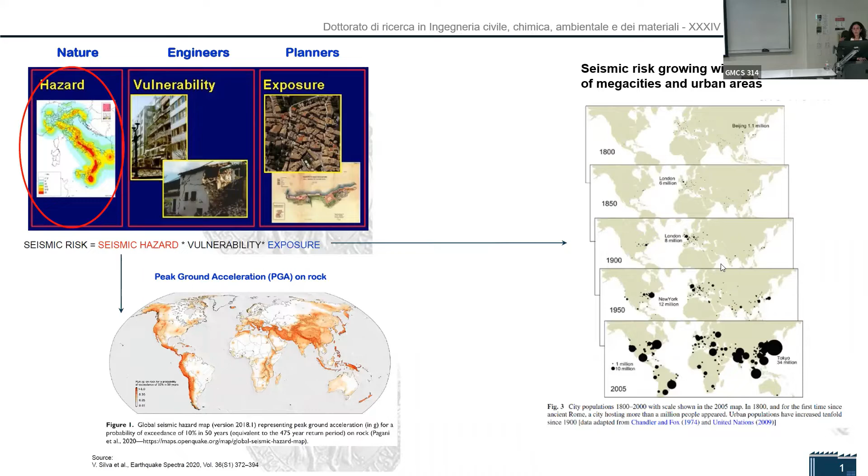It is getting higher, and so the mega cities are spreading all over the world, and this means that the exposure is increasing. So this will increase, of course, the risk, and we need to focus on this aspect.

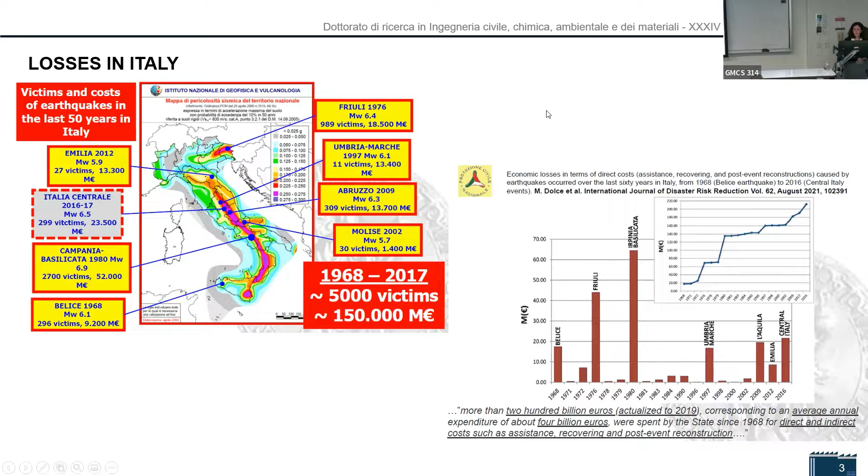So this is just an introduction of what I did. So as you understood, risk is actually a multidisciplinary problem, because you should evaluate the seismic risk in your area for your building, knowing both the properties of your building and the hazard of the site. And you should also be able to make a quantification of the values that are exposed to the risk.

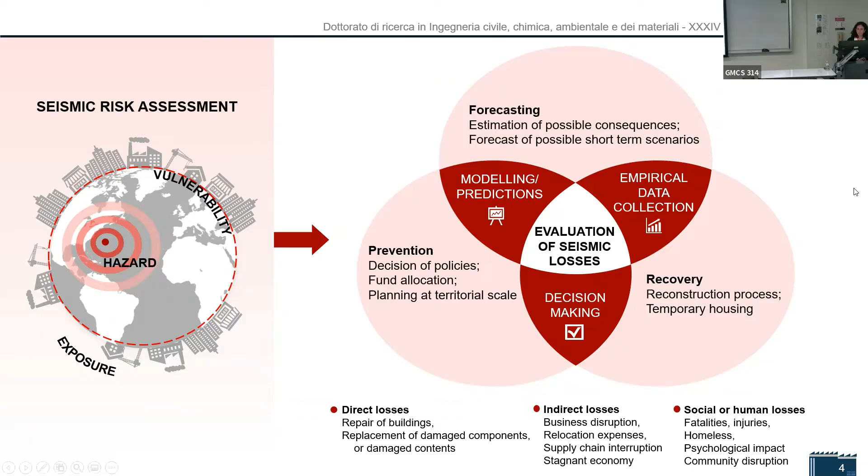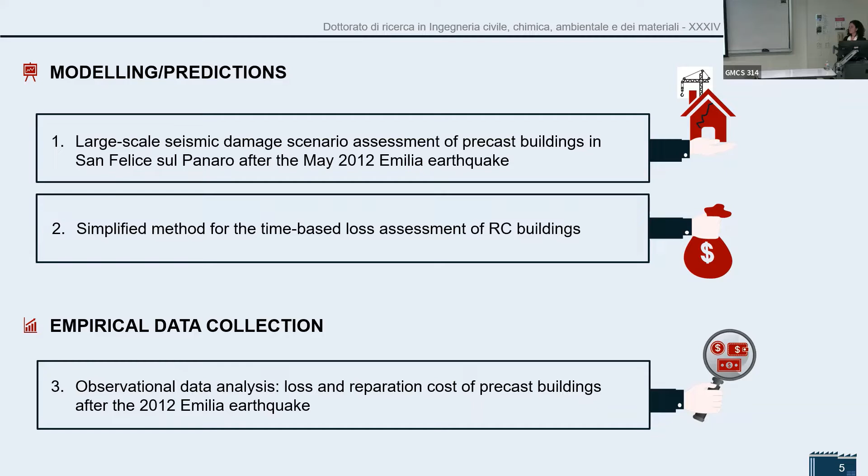So I will focus mainly on three main topics which I addressed in my PhD thesis. Two of them dealing with modeling and prediction of losses, and one dealing with empirical data collection. The first one is a large-scale scenario assessment, considering the industrial areas that are hit by an earthquake.

So in this case, we consider the seismic event in the Emilia-Romagna region, which is our region, that hit the region in 2012. And in particular, I was focusing on the seismic behavior and the damage and the losses of precast reinforced concrete buildings.

In our region, there are many industrial districts where these kinds of production, commercial and industrial buildings are located together. So basically, there is like a town and close to it, small industrial areas. It is pretty much like this everywhere in our region. And in these districts, there were many structural collapses after this seismic sequence.

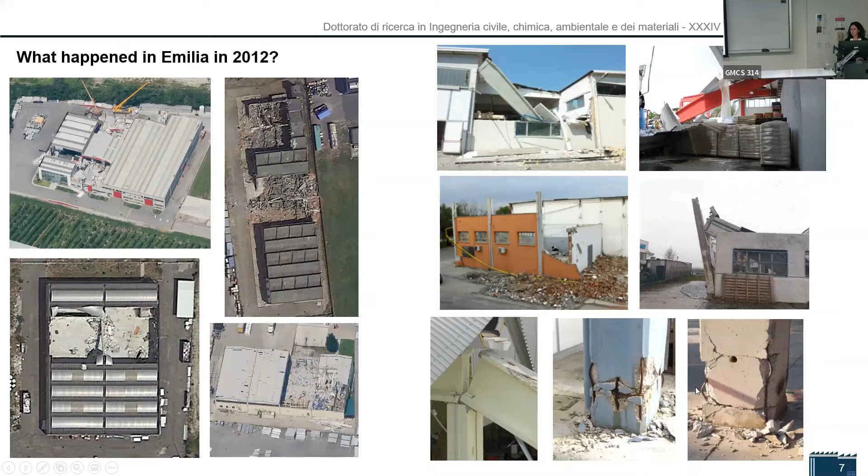So there were many collapses due to loss of support like these, but also collapse of the roof, loss of verticality of the columns like this one, and then formation of flexural plastic hinges at the base of the columns.

Moreover, there were many examples of damage to non-structural elements like the perimeter cladding panels, which were precast as well, very heavy. In many situations the connections were not sufficient to sustain the mass moving with the earthquake.

So there are many examples of fallen precast cladding panels and loss of verticality, but also fallen masonry infill walls like this one below, or out of plane behavior of the masonry walls like in these pictures.

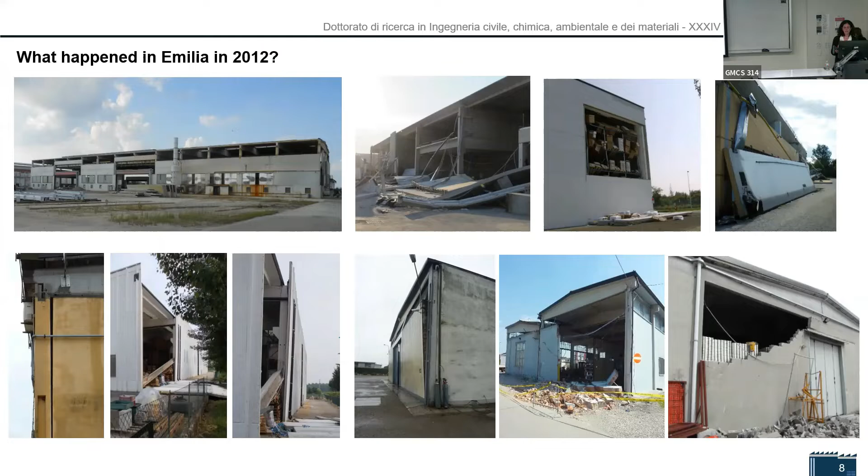So there are different kinds of seismic damage, but it is possible to classify this type of damage, and they are pretty much recurrent. This makes our work easier because for this kind of buildings it is quite easy to understand the seismic behavior, as there are few examples of damage development and collapses.

So what we did is we wanted to create a method in order to perform large-scale risk assessment for industrial areas with this kind of precast buildings.

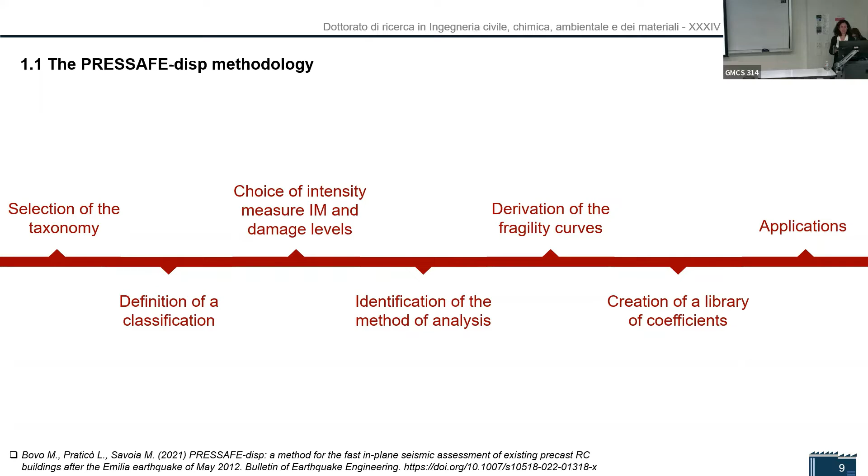So we have just put a mark on different steps of the analysis, and all of them were involved in quite a lot of work, actually. First of all, we had to select the taxonomy.

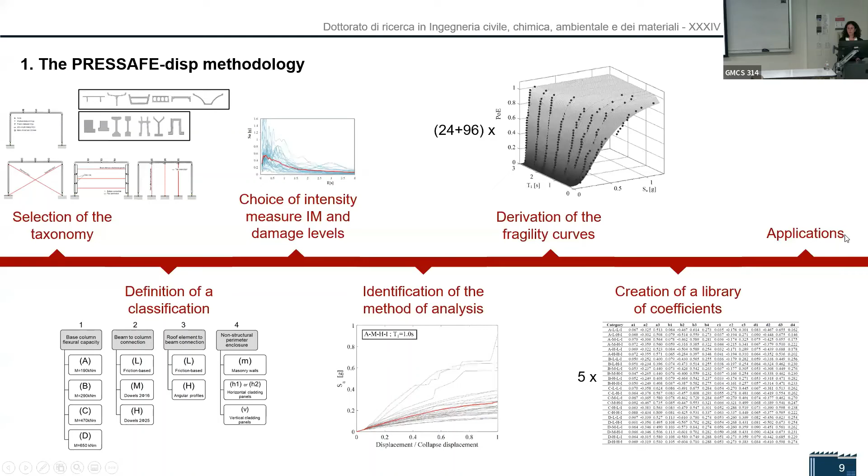So this was the aim. But how could we know if the curves were reliable or not? We did an application of a seismic scenario to see if it was possible to find reliable results, knowing a specific real situation.

So what we did is we found an industrial area, San Felice sul Panaro, which was very close to one of the epicenters of the seismic events in 2012, inside the Emilia-Romagna region, up here close to Bologna and Modena.

And yeah, here it's there's Cesena, which is my hometown, just to see.

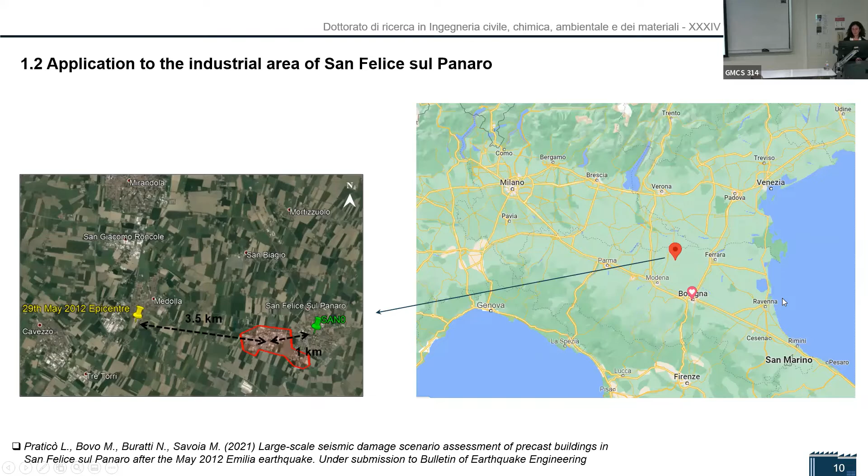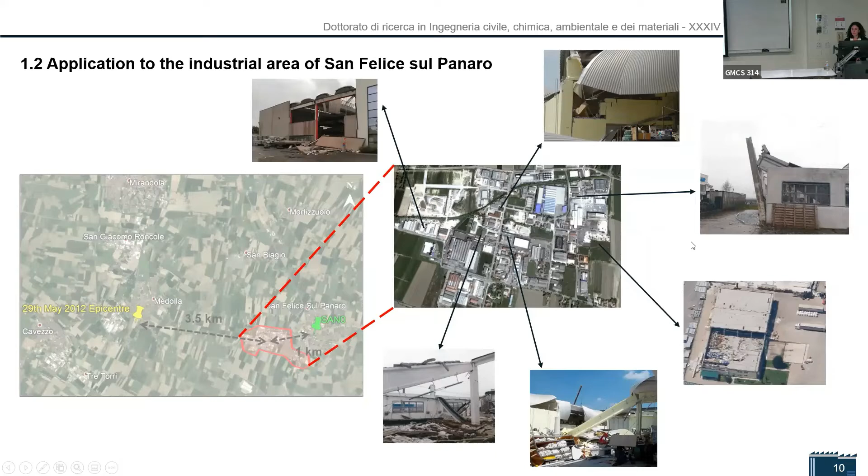So we selected this area, which is the industrial area of the city of San Felice, with about 100 industrial precast buildings. Those buildings behaved in the same way that I've shown you before, so there were the same kind of damages to the structural elements.

So we performed a large-scale evaluation of the number of collapsed buildings under a specific seismic scenario, because we had a huge amount of documents on what happened during the seismic sequence in that area. So we were able to see if our curves can work to provide the result of a scenario assessment like this, and to forecast the exact number of collapsed buildings in this case.

So what we did is we developed a Monte Carlo analysis in order to simulate the behavior of those buildings under 3 different seismic scenarios, all referring to the event of the 29th of May 2012. And we knew that the exact number of collapsed buildings in that scenario was 42.

So it was nice to see that going from a less refined to a more refined seismic input - basically the quantification of the ground motion - with a very refined model for the seismic input, we came out with a good matching with the average number of collapsed buildings in the area, using this scenario analysis.

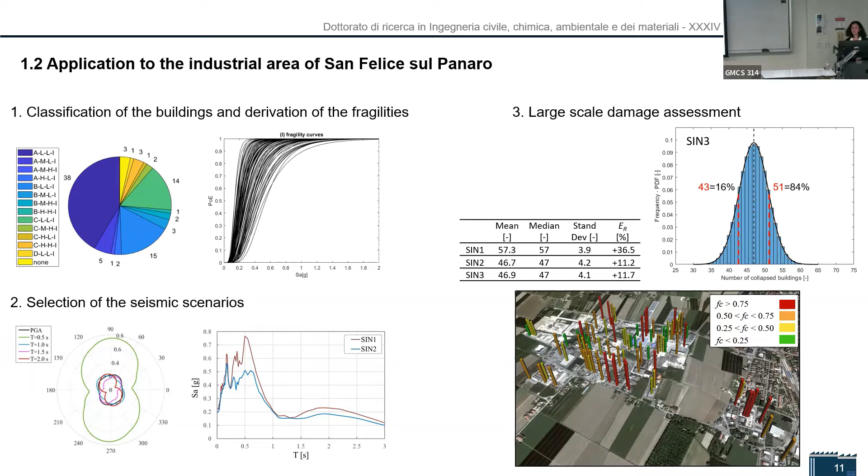And we will perform similar verification also in other industrial areas for sure in future works. So this is just an idea of what I was saying before. We also developed a more direct simplified method that can be used to obtain rapid results, and what was nice is that these 2 methods were giving mostly the same outcomes.

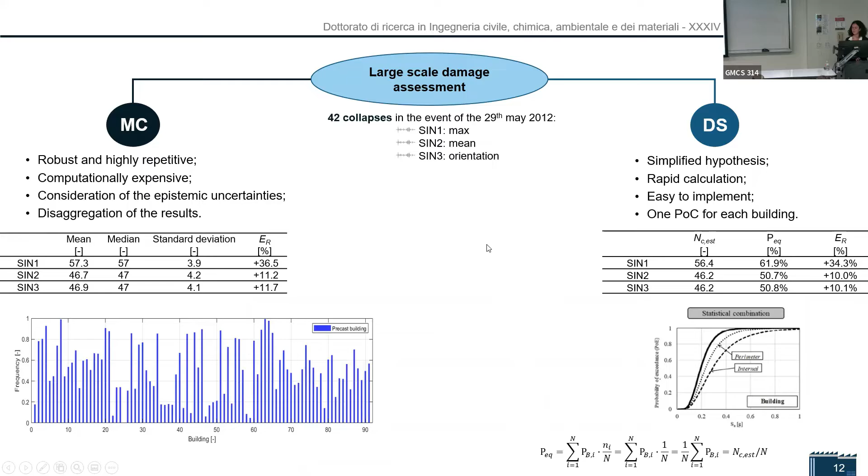So the goal of this first part was to try to provide a tool giving a uniform approach at the large scale for the risk analysis of precast buildings, a tool that requires few data to be used. And it was good that we found a good agreement in application of the methods compared to the real data that we got after the seismic event.

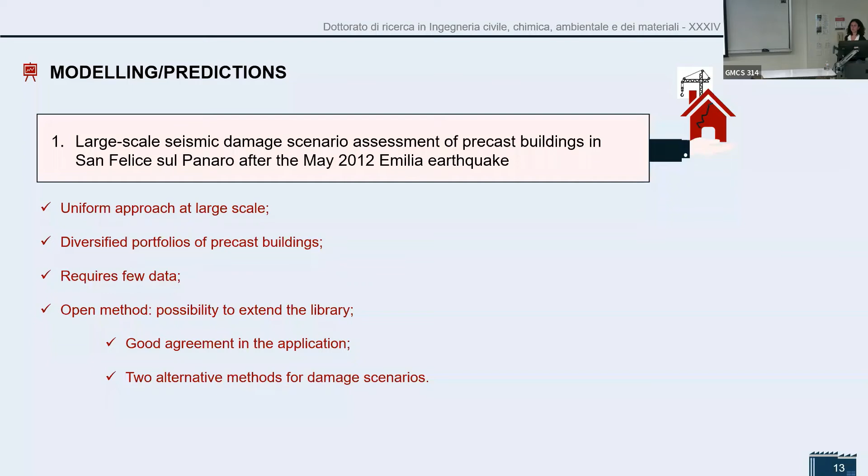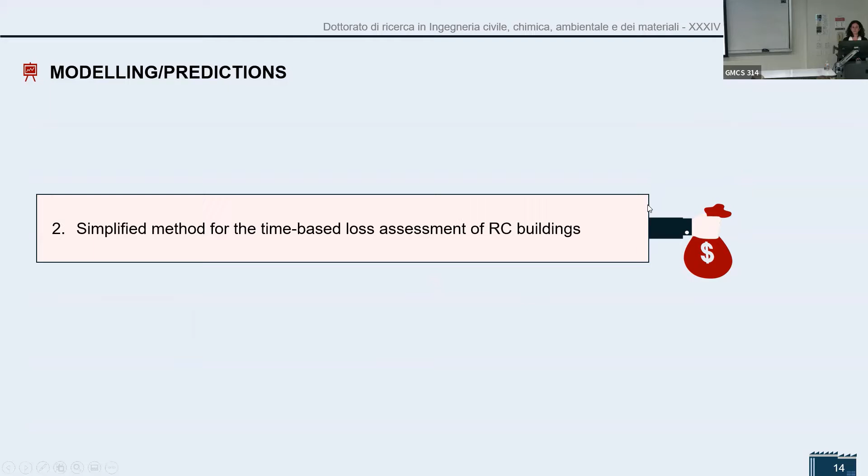Okay, so very fast, another tool that I developed concerning the modeling and prediction of losses is a time-based loss assessment on reinforced concrete buildings.

So maybe it's not the same here, but in Italy, ordinary buildings like houses, offices, residential buildings, are mainly masonry or reinforced concrete. This is the majority, at least.

Since our existing buildings are quite weak to seismic actions, we need to retrofit them. We developed a method to estimate the unconditioned losses - this is why it is called time-based assessment - so to estimate the losses under several seismic actions that may happen to this building in 1 year.

This is the idea: in order to evaluate which kind of retrofit option can be the optimal one for a specific building. In this case, this tool is devoted to application on a single building, not a large-scale application, and should be used in the preliminary phase when you have to decide which kind of seismic intervention can be most appropriate to your structure, to lower the amount of expected seismic losses.

And here we have considered 3 applications: FRP techniques like fiber reinforced polymers, concrete jacketing, and CAM, which is an Italian technique, like an active confinement technique with steel elements. So basically they are quite simple interventions, but quite common, applied mainly on the columns in frame RC buildings.

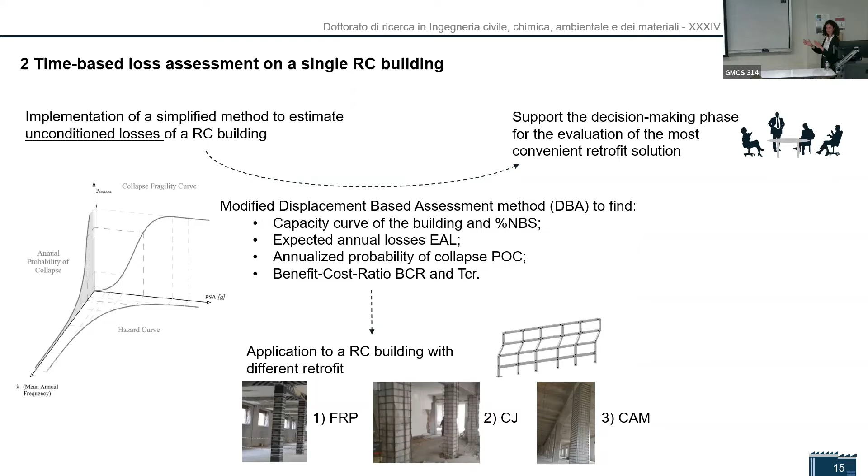So this is the framework of the analysis, and it is a simplified analytical method, starting from nonlinear static analysis, the pushover analysis, that is implemented nowadays in every software of structural calculation. This method is thought to be simple and used by practitioners, by engineers. So it shouldn't be very complex, but still able to give reliable results, at least for the comparison of the different options.

This is the goal. So starting from nonlinear pushover analysis, we are basically considering the losses coming from the repair of the structural elements, the repair of the non-structural elements, but also coming from the probability of demolition of the building and the probability of collapse. So if the building survived the earthquake and has to be repaired, or if the building is heavily damaged and has to be demolished or collapses.

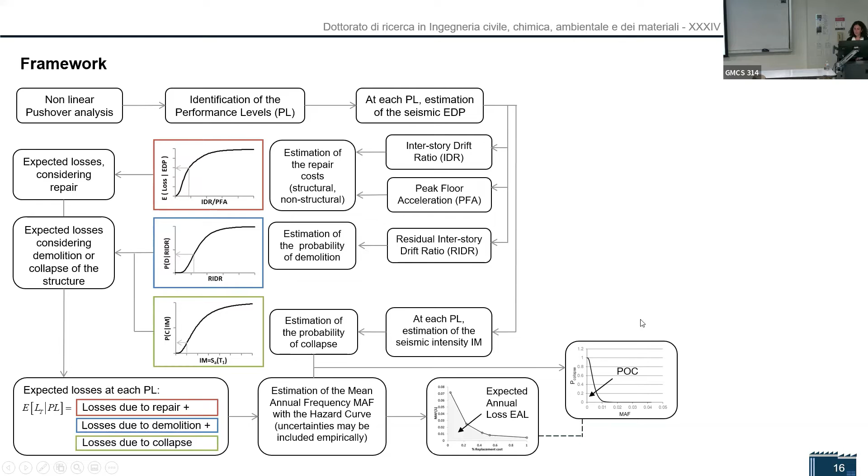This is the idea. In this time-based framework, we come out with this term, expected annual losses, and a term which is the annualized probability of collapse. These loss terms should be compared together in order to find the retrofit option that gives the lowest expected annual losses and the lowest annualized probability of collapse of the buildings, which means your building is good, it is robust to seismic action. This is the idea.

And then we evaluated some other economic parameters like the cost of the retrofit, the net present value, which is the loss after a certain life period of the structure, like 50 years, which is common for ordinary buildings, and the benefit cost ratio, to let you understand which is the most economically convenient retrofit option.

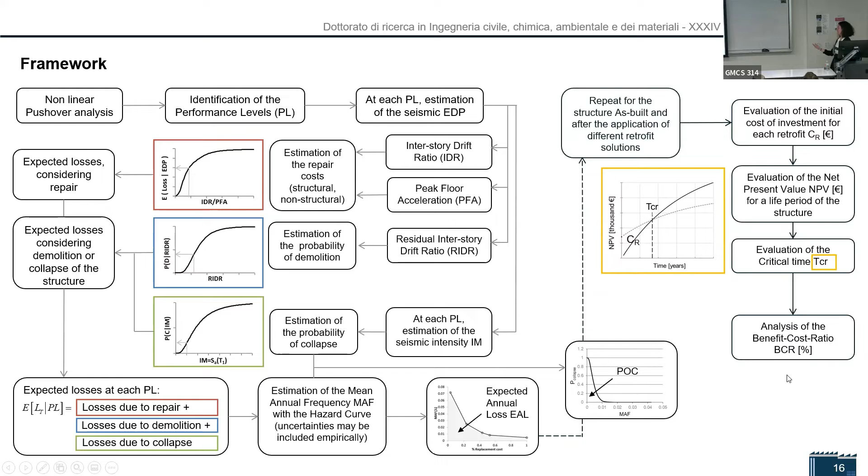So yeah, we just got some results for this building. I will go fast here. Finally, the aim of this tool is to provide a graph like this one, where you can directly compare the result of your analysis, knowing for each option, like making separate pushover analyses on different models.

So you model the effect of this retrofit, of each local intervention on the columns. You run the analytical analysis, which is a step-by-step analysis. It is quite simple, it's not complex.

But finally, you come out with an indication of the expected annual losses, which is the amount of losses expected over 1 year, annualized, the probability of collapse, but also the NBS, which is the indication of the safety of your buildings, like a safety index, and the benefit cost ratio, which depends on the initial cost of investment that you have to sustain for each retrofit option.

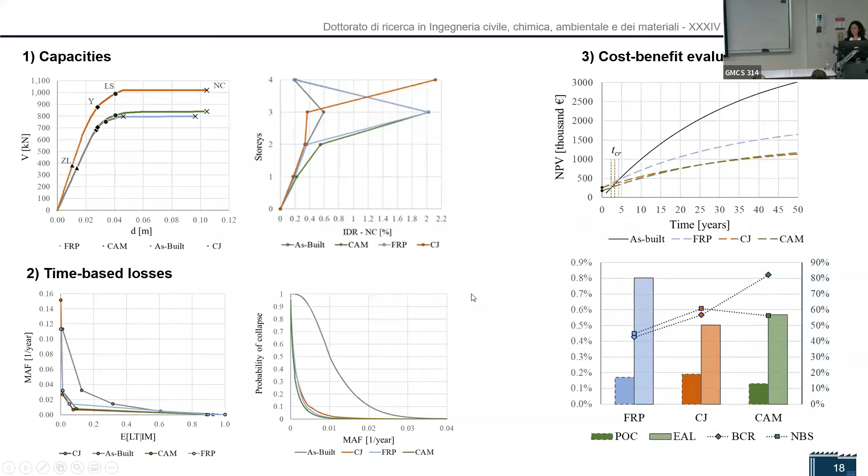So if you compare these terms, for example in this case, the CAM option is actually the best option for the case study building that we evaluated, because it is able to lower the losses, the expected annual losses, the probability of collapse of the building, but with a high benefit cost ratio. So it means you're not spending too much money, and you also have a good safety index of your structure. So looking at this graph, I would go for the CAM option for that case study building, for example. So this is the idea.

I will not go into too much detail on this. So what was the aim again is to give a tool to be used at the design stage, not to give the best absolute results, but to set a uniform approach for a comparative evaluation of the results. So if you have several options and don't know what to choose, if you just base your evaluation on the initial cost of investment and on the result of some modeling, it may not be enough.

You should also make some loss evaluations. In Italy, recently they developed something similar, but even more simplified, to try to set loss evaluations in the work of engineers, because they should be quantified, they should be computed, since it is not enough if you just compute a safety index for your buildings. So this is the main idea of this work—everything is to support the decision-making phase of the engineer, but without complex analysis.

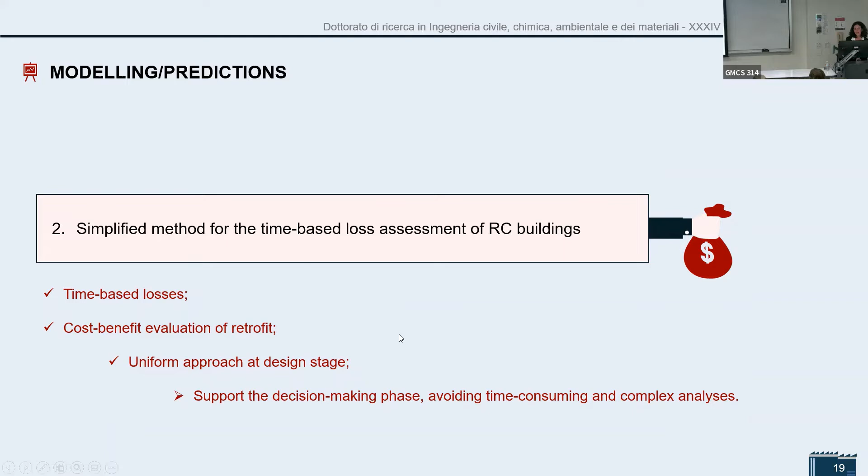And okay, in the last part, I saved some time for this, because here I had the opportunity to work with some important data regarding, again, the 2012 Emilia earthquake. Of course, this earthquake in particular hit and damaged ordinary buildings, but I was mainly working again on the precast reinforced concrete buildings, damage and collapses.

It's important to have an idea of what happened in terms of losses and in terms of data of the damage. In particular, in our region, this is a scheme of the core area affected by the seismic sequence in 2012. In that area there was an industrial hub that was very important, hosting different companies, Italian but also international, that were producing the majority of the income for the area, for the region, but also for Italy. So there were many industrial clusters, from mechanics to food industry, and also biomedical products.

So the problem was that all these companies were working in unsafe production buildings, because those buildings were not designed for seismic actions. Because before 2012, that area was considered in the national regulation as non-seismic. So we were not expecting that ground motion. That area was producing 2.5% of the national PIL.

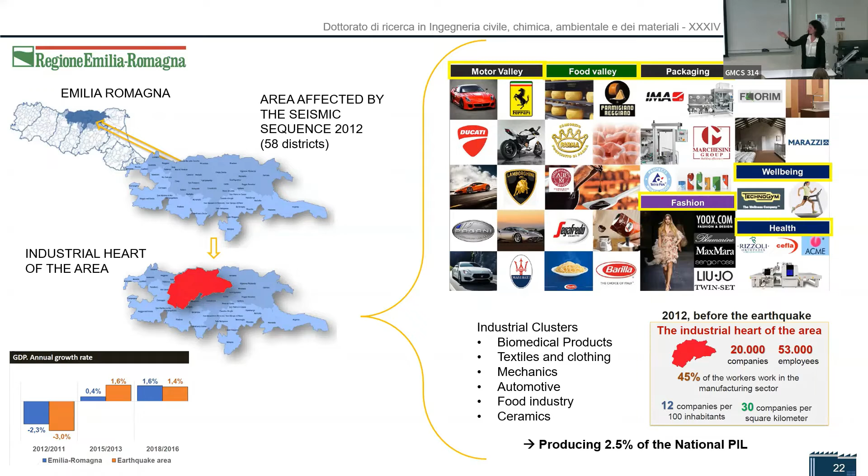What does PIL stand for? Yes, that's the Italian. It's the Prodotto Interno Lordo, which is the Italian for GDP, gross domestic product. Yeah, you're right. I have to change it. Okay.

So our region, Regione Emilia-Romagna, created a database aimed at collecting all the requests for funds for the reconstruction after the seismic sequence, in particular those concerning the production buildings. There was a specific decree defining all the criteria for the reconstruction, the repair and the retrofit of the buildings, but also for the restoration of the products, of the industrial machinery, and the relocation of the activities.

So this was the entire Sfinge database. There were more than 2,000 industrial buildings, with all the data about damage to the structures, damage to the contents, and the economic losses, which were equal to the amount of funds to be given for the reconstruction by the state. I created a smaller database, because I had to make a process of selection to define only the precast RC buildings, those we have seen before. This smaller database is like 1/3 of the biggest one, and another even smaller database has also some geometrical structural information on the buildings.

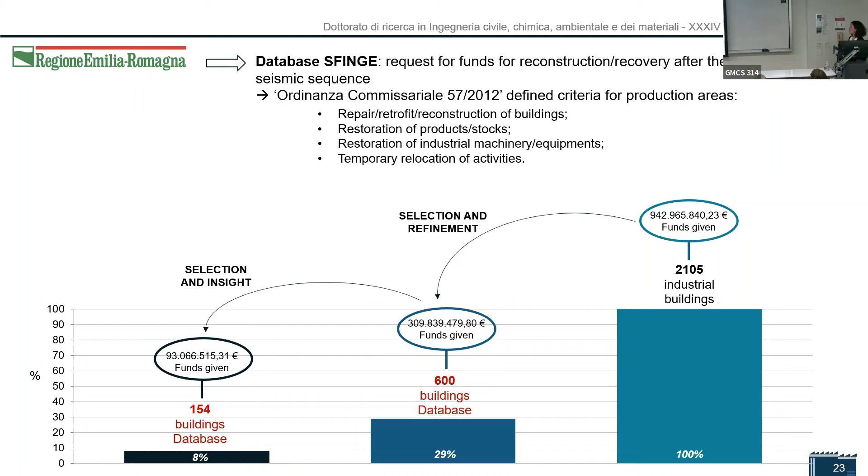With those data, it is very important for us, in the field of risk assessment, to study the real data of losses and damage on buildings, because with this data you can calibrate your models. So it's important for us to spend time working on these databases to find suitable consequence functions. We will see them.

Okay, sorry. So first of all, we had to identify a damage scale, from D1 to D5: the building experienced slight damage, moderate, heavy, very heavy, and then collapse. We had to define also some criteria for this. There are some recognized criteria depending on, for example, the amount of columns with plastic hinges for moderate damage, the amount of surface collapsed, these kinds of numbers.

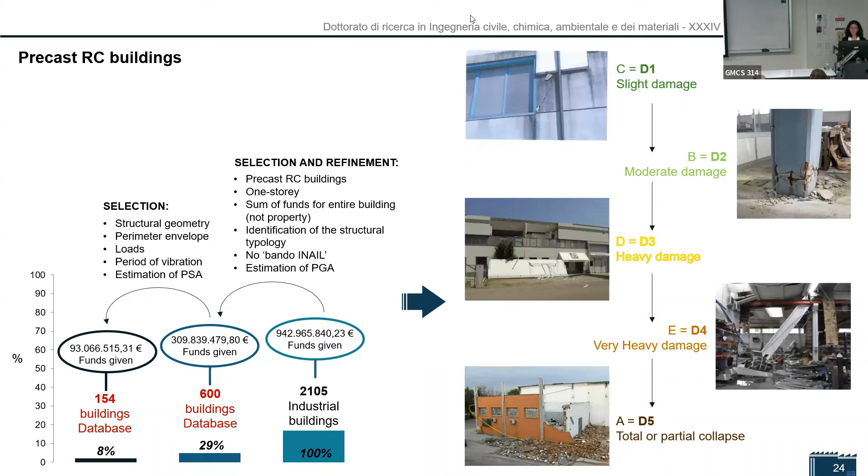This is very similar to these pictures you may have seen from the European Macroseismic Scale from 1998, which is one of the reference documents for us for the seismic damage scale on ordinary buildings like masonry and reinforced concrete, and I have added my own scale on precast RC buildings.

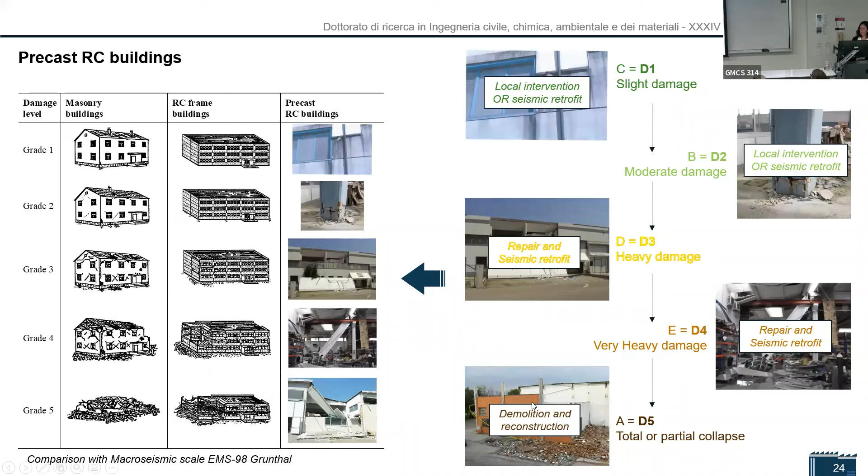According to the regional regulations, there were also some instructions for the repair and retrofit of each building, depending on the damage scale. For example, for D1 buildings, they said they needed local intervention on some structural elements or entire seismic retrofit. Whereas D5 buildings had to go for demolition and reconstruction, of course.

T1 are the oldest industrial buildings and the smallest ones, while T2 and T3 were the newest, in which T3 were the newest ones with the highest columns, the longer precast elements, the largest surface in plan, for example. So these are the most common ones in the region, but I can say also in other parts of Italy.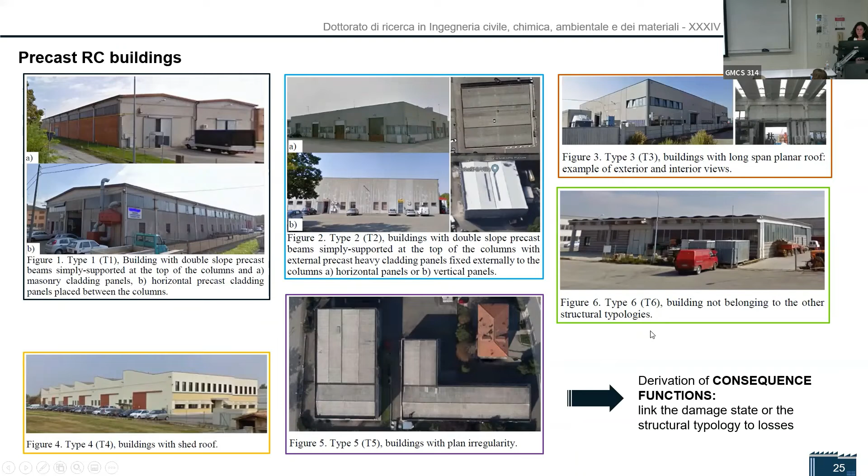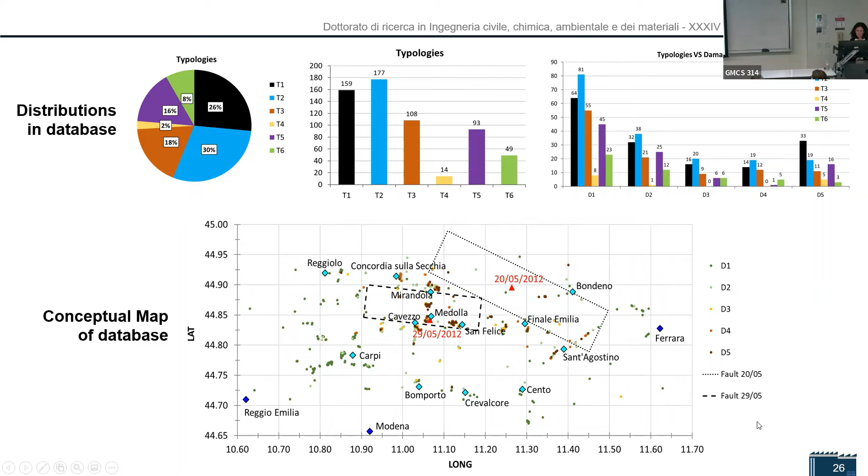So what we have to do is consider the main typologies, the most recurrent ones, like T1 to T3 in this case, and derive consequence functions. It means that for different structural typologies and for different damage states, we wanted to define the distributions of the seismic losses, understand the mean value of this distribution, the deviations, but also all the statistical parameters, and calibrate suitable functions that may be adopted in seismic risk assessments.

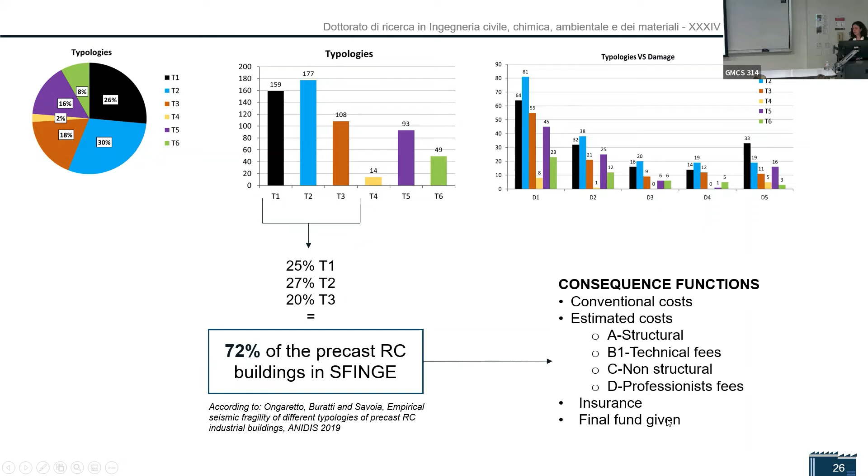So these functions may be used in the models in order to forecast the possible losses, because these are based on real data. And what is interesting is that in the database, the structural costs, non-structural costs, but also the fees were categorized differently. And there were also some other voices like the insurance and the final fund given by the region, which were not always corresponding to the entire losses. There were some different cases.

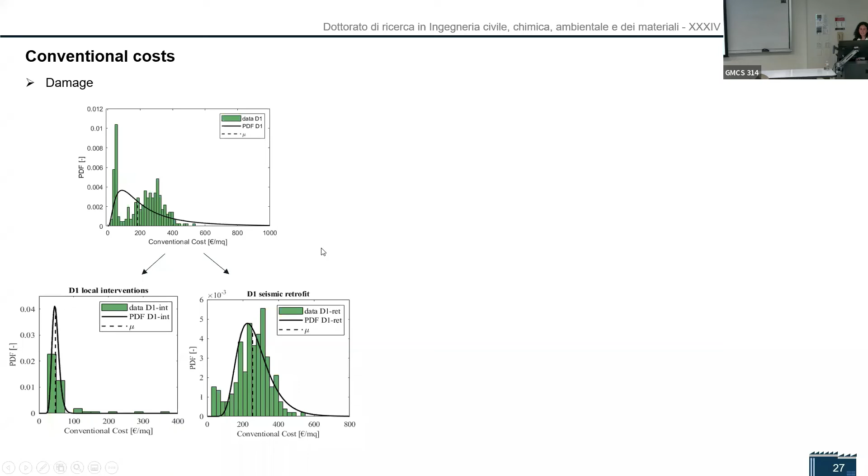You can identify a first peak here, and then a second peak of the losses here: D1 regarding all the buildings that just had to do local intervention techniques on, like, the columns, for example, and this other group of D1 buildings, still experiencing slight damage, but which had to pay for the seismic retrofit of the entire buildings. So of course, we are expecting that these losses are higher, and we cannot just make a consequence function like this one, because it is not reliable, it is not realistic. So this is one of the issues that we had to consider, and we did it. I just reported some examples of what we did.

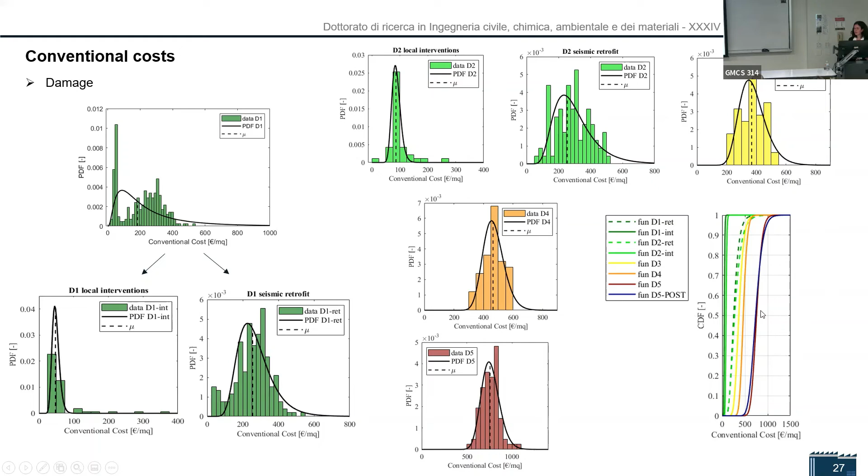So for each damage state, from D1 to D5, we came out with these curves. They are quite stretched, but this is the cumulative density function. So knowing this curve, if you have a specific damage state for your building, in this case for the precast ones, we are able to know the expected average conventional cost in euros per meter square, and we are able to make predictions. So we did it for all the structural components.

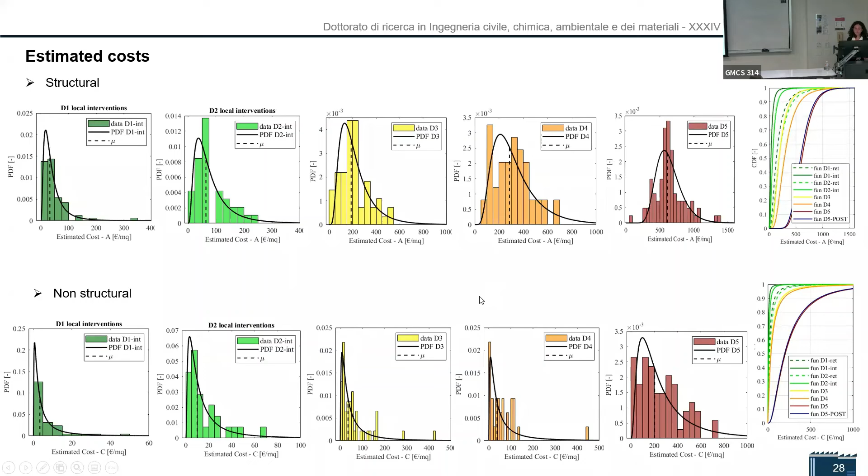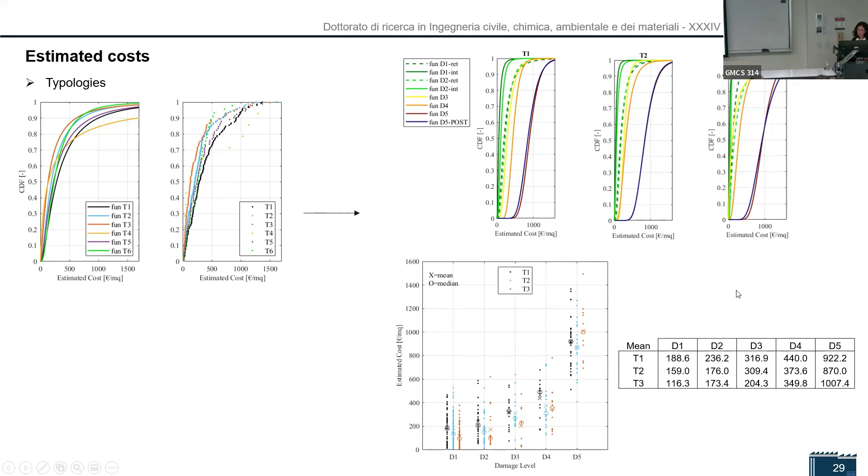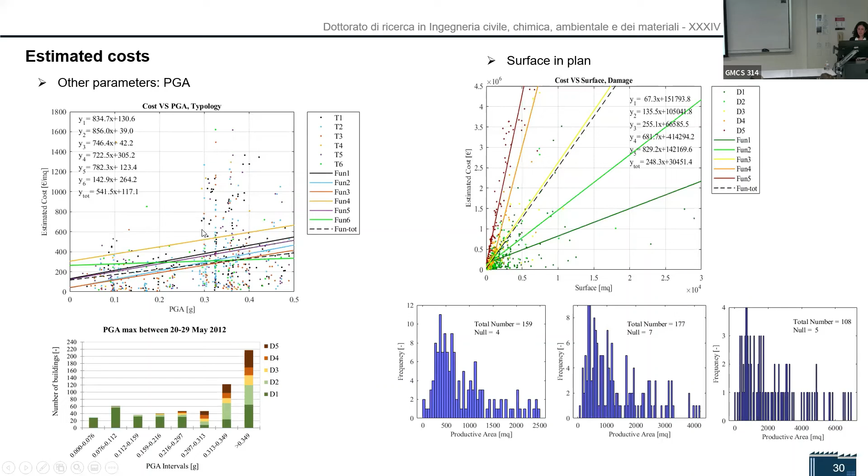So we came up with many data. Also, we have studied the amount of expected losses against the PGA, so the shaking intensity, and also the surface plan of the buildings. So these are just other useful functions that you may use in your modeling. Even if I have to say that with the PGA there is a huge deviation of the values, we know this issue.

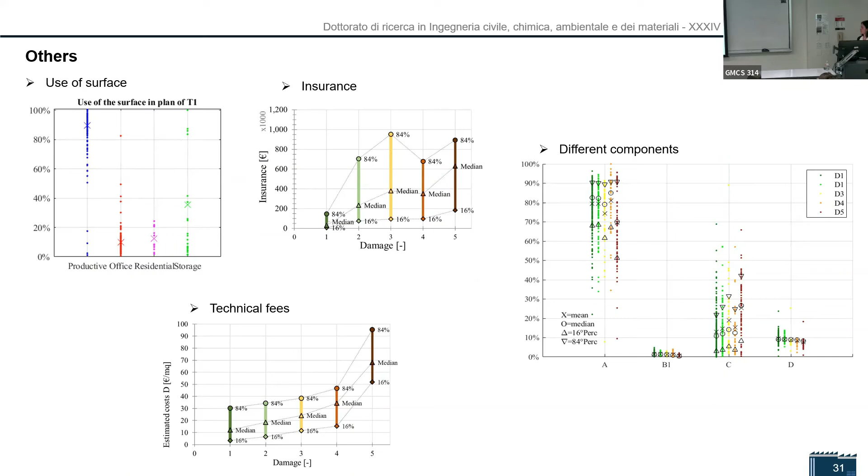And then just other interesting parameters that you can study in your database, like the insurance, the percentage use of the surface of the building, and basically the losses coming from different components, like we have mentioned, structural and non-structural. There are also the fees of the professionals and these things.

And just a few words. In a smaller database of 150 buildings, I was able to categorize also the main structural parameters. So there is also a possibility to know the distribution of the main geometrical and structural properties of the buildings, the construction periods, for example the length of the beams and the roof elements. From this graph, you can see that typology T3 is that with the newest buildings, because the roof elements become longer compared to the beams, and this is because of the advancements in the manufacturing processes.

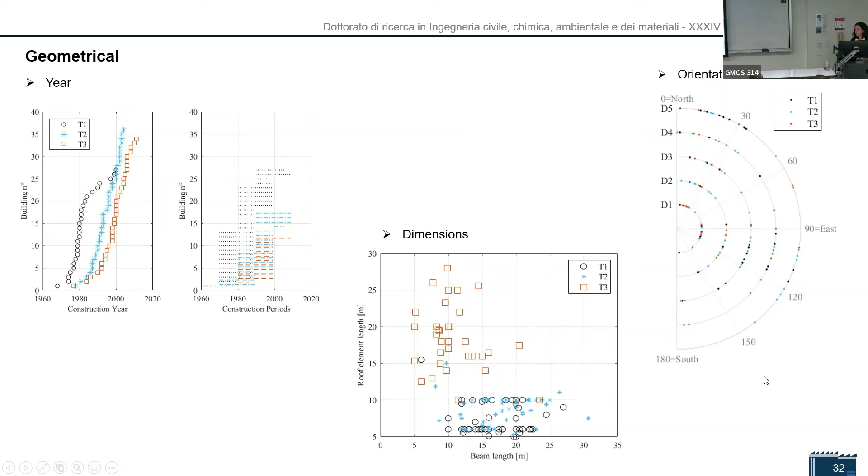And then the geographic orientation of the buildings, which is following, as expected, the main streets limiting the areas, the two main orientations. And then we also tried to study the losses and the damage level depending on the spectral acceleration on each building of the smaller database. At least the average values are kind of increasing. And also the spectral displacement demand and the capacity on each column.

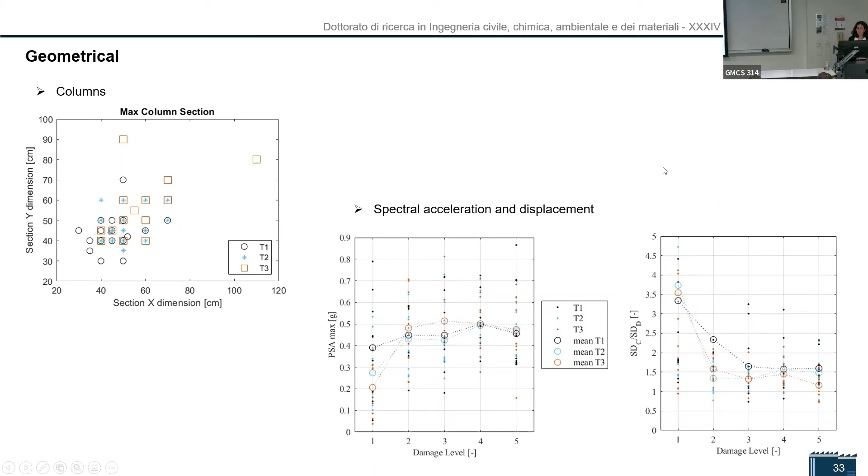So these are just some examples of what you can do with a database. Of course deriving the consequence functions, but also trying to develop other important structural information that you can derive. It's very important to analyze the real data. So the goal here was to create this comprehensive database on precast buildings, collecting all the possible data and analyzing them. It is something that was not available in Italy so far.

We already had some important databases on ordinary buildings, like the database DaDO. You can find it on the web, but it didn't have information on this kind of industrial facilities, industrial buildings. So this was a very important part of the work.

Then it is important that we tried to calibrate these consequence functions both at different damage levels and for different common structural typologies that can be present also in other regions, but also in other countries of the Mediterranean area. So this is to provide tools to forecast possible scenarios and of course to perform risk analysis on this kind of building.